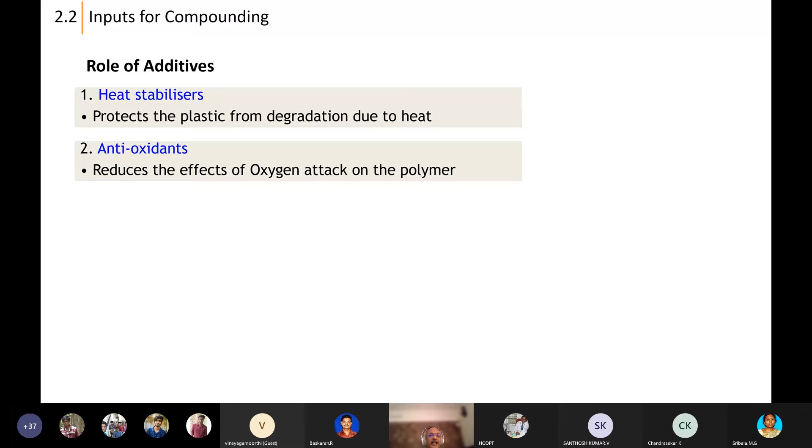Then another important category is the UV and light stabilizer. Today, most plastic parts get exposed to sunlight. Sunlight is dangerous because UV light has a very bad effect on the parts, degrading the plastics. Plastics are susceptible - expose any plastic part to sunlight and after some time it will break like appalam, it will simply break. So any plastic exposed to sun should have resistance against UV.

So here, a lot of hindered amine light stabilizers are commercially available. When you get into the industry, you will be able to know which ones are commercially available. These additives give protection - they absorb the UV light and give it back in another wave, another frequency, thereby protecting the plastic from the effect of the UV. That's all.

So you see a car has got a lot of plastic parts on the outside, like mainly the bumper. Bumpers were once made in metal. Today, almost all car bumpers are made in plastic only. These bumpers are made of polypropylene with impact modification as well as UV stabilizers and light stabilizers.

Here again, how you check whether it has got sufficient UV stabilizer to withstand this effect is you have testing equipment like weatherometers. In a weatherometer, you expose it to UV light, you expose it to conditions like rain or daylight, and then over time, after exposure to UV light, you test what is the drop in property.

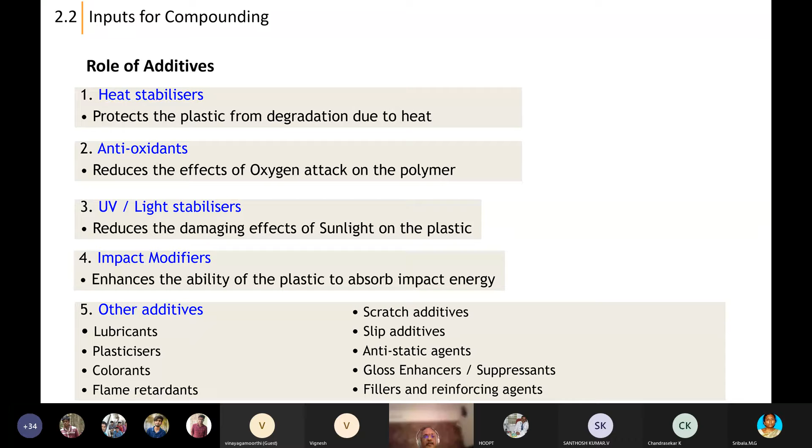Then the last category I am talking about is filler and reinforcing agent. They form a very good percentage, something like 10 to 60% of the plastic formulation contains fillers and reinforcing agents based on the end use. That is a large category. Apart from this additive, there are other additives also, which I am not touching right now. So let me get into the fillers and reinforcing agents. What is the role of a filler and reinforcing agent?

So you have again a variety of fillers and reinforcing agents. First, you have mineral fillers: talc, chalk, calcium carbonate, wollastonite, red sand. All these are mineral fillers. What happens is it gives you higher heat distortion temperature, so higher service temperature.

It also enhances the paintability in some plastics. If you take nylon 6 or nylon 6/6, a plain one is very difficult to paint. If you paint it, it will peel off because there is not sufficient adhesion between the polymer substrate and the paint. In such cases, you add a mineral like talc. Talc offers a surface which likes the paint surface, so the adhesion between paint and polymer substrate improves when talc is added in a nylon matrix.

So mineral fillers are a major constituent. Bumpers normally use a mineral also. Another big advantage of mineral is it will also bring down the cost.

When you have 100% polymer, take for example nylon. Today nylon 6/6 is 400 to 500 rupees per kilo, whereas a filler like wollastonite, used in nylon, is 60 to 70 rupees. So if you substitute 10% of the polymer, it brings down the cost. Of course, there will be changes in properties. Depending upon the application, the user can decide how much filler content is permissible for a compound.

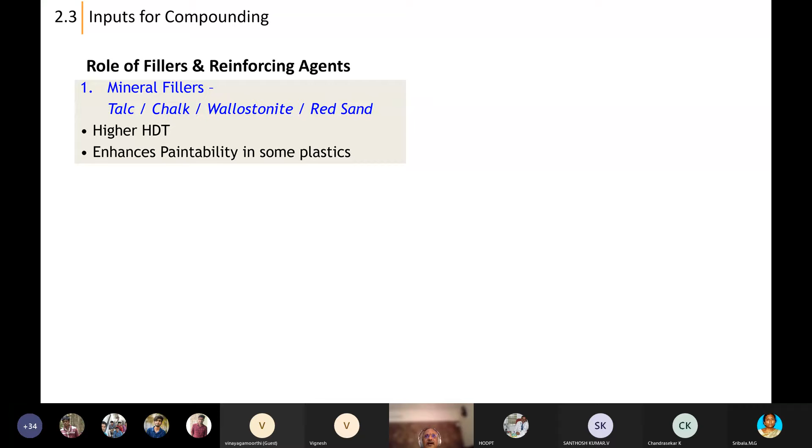But the red sand they use cannot simply be taken from the ground and used. They have to reduce the particle size, make it uniform, then add it. So it is not a viable alternative for other countries.

The other category is glass beads. Again, in glass beads, there are solid beads and hollow beads. A glass bead is nothing but glass powder. You take glass, you powder it, you get glass powder, that is glass beads. So again, you have solid beads, which are solid powder, and hollow beads have a vacuum inside, which is very hollow. So depending upon the performance and the component, it gives different strength.

Hollow beads are the latest technology. They are not fully commercialized. They are in their infancy. So right now the cost is very high. They give you a very good thickness to performance ratio - I will come to that later. They also give you higher thermal properties.

Isotropic shrinkage: in any plastic part, when subjected to processing, especially injection molding, you have a flow direction and across direction. I hope students can understand flow direction and across direction. You have a flat component, and you are injecting from one side, so material flows from one end to the other - that is flow direction. The other direction is across that. The property of plastic varies between flow direction and the other direction, which is not good for many applications.

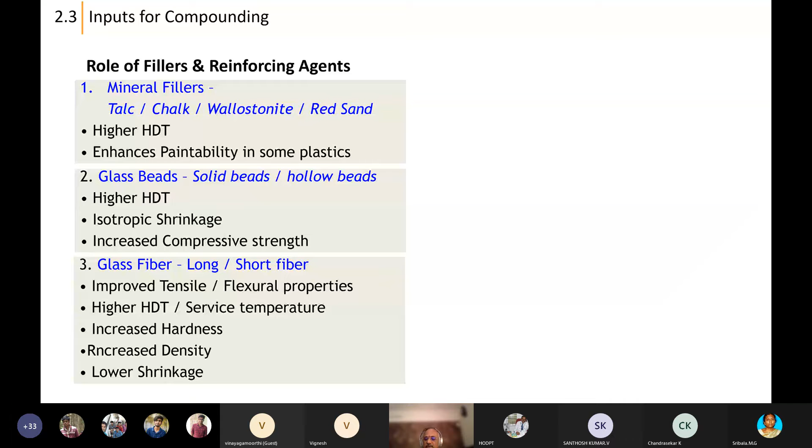Then we'll see specialty reinforcements. You will not see many commercialized ones here. Of course, carbon fiber you would have heard of. Boron fiber and basalt fiber are very, very rare. They give you excellent properties. A basalt fiber is actually made from rock - basalt is a mineral available mainly in Russia. They powder it and melt it at a very high temperature, around 1500 degrees centigrade, and make it into a fiber, which gives exceptional properties. You can see the word excellent strength-to-weight ratio, strength-to-thickness ratio. This is very critical when you use carbon fiber, boron fiber, or basalt fiber - for a very low thickness, you get exceptional performance.

For a lower weight compared to metal, it will be able to withstand a good load, very good thermal performance, and controlled coefficient of thermal expansion. You all know every material has got a coefficient of thermal expansion.

You see metal, when exposed to heat, expands. That's why railway tracks are laid with a gap between two tracks. Why? Because in summer, when the temperature goes up, the track length also grows. If you put one track next to another very closely, they will collide and distort. That's why they leave a gap between two tracks to take care of the coefficient of thermal expansion.

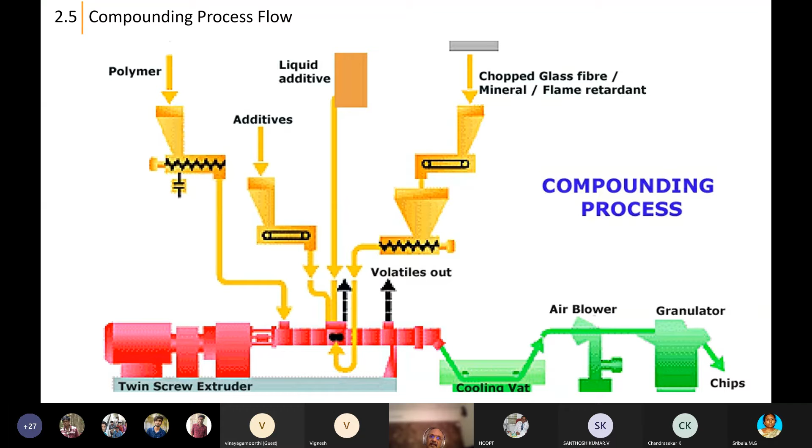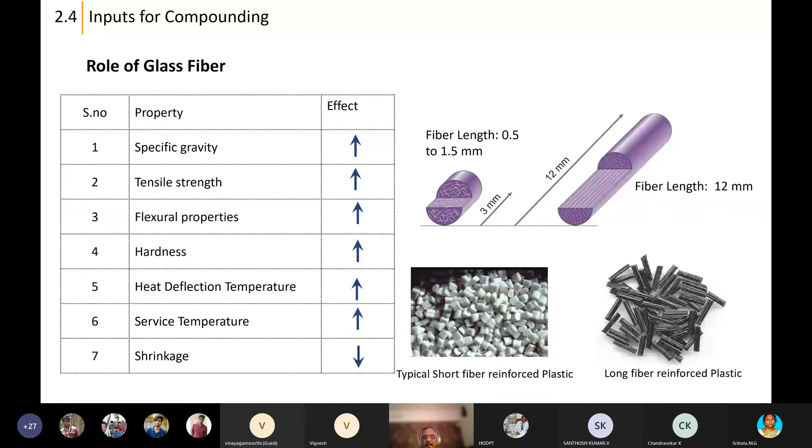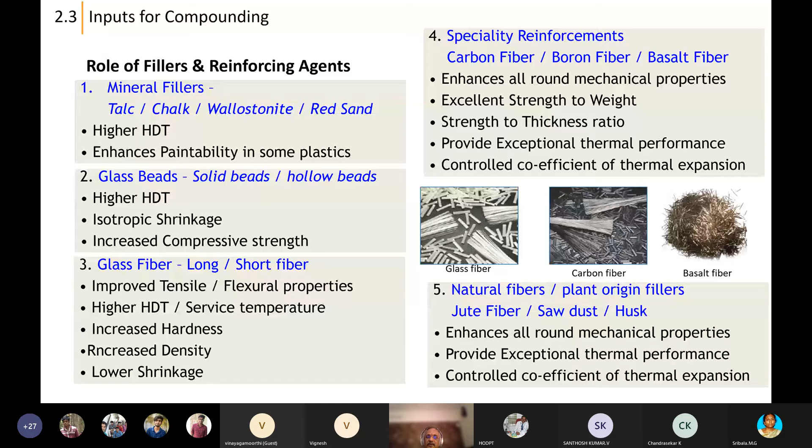The extruder screw will be rotating, it will pull the glass fiber, and depending upon the ratio of polymer and glass fiber going in, you decide how much glass content is there, either 15, 20, 30, or whatever you want.

So this is the compounding process flow. You have an extruder where the polymer, all additives, minerals, and reinforcing agents are used. They are melted, they mix very well inside the barrel, come out of the die in the form of a strand, get cooled in the water, and then the longer strand is cut into smaller granules.

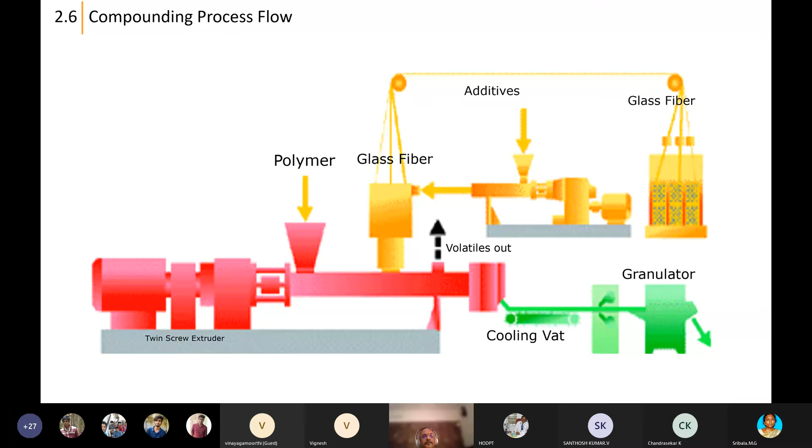Again, you can use a single screw extruder also. The earlier two process flow diagrams I showed used a twin screw extruder. When the compounding technology first started, people used only single screw extruders. Even today, it is used in the case of PVC and some other polymers, like recycling and all.

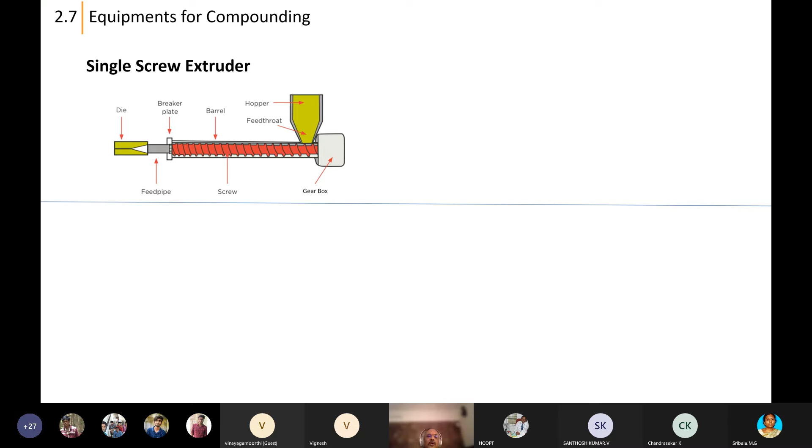In a single screw extruder, you simply see one extruder. There is a barrel on which heaters are placed. You load the material into the hopper, and from the hopper, by gravity, the material flows into the screw. When the screw rotates, because of the friction between the screw and the barrel, the material moves forward.

So what facilitates the material movement from the hopper to the front end of the barrel is friction and gravity flow, that's all. Depending upon the type of equipment, the type of polymer, the temperature, or the screw design, you may have varying levels of movement of plastic, so surging can happen because the flow of polymer may not be uniform.

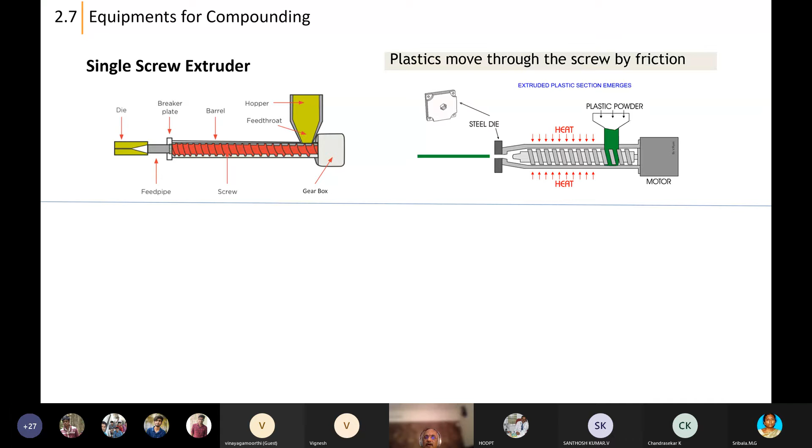So these days we do not use a single screw extruder for compounding. 90% of equipment used today is a twin screw extruder. There you have two extruders which are intermeshing, rotating in the same direction or opposite, known as counter-rotating and co-rotating. The majority in use are co-rotating, where both screws rotate in the same direction, close to each other.

When you see the two screws rotating, you can see the intermesh, where each screw is almost touching the other, so whatever material falls between the screws gets carried forward positively. Whatever falls in the polymer feed zone will pass through the entire barrel uniformly, get melted, get thoroughly mixed, and then come out of the front. So you have different sections.

Another beautiful part: in the first picture, you see the single screw extruder is almost a uniform kind of screw, with differences in pitch and screw depth depending on the feed zone or metering zone. But in a twin screw extruder, you can see multiple types of segments are used.

There are segments which will help you mix the polymer thoroughly, segments which help make the flow of the polymer fast and also retard the flow. You also see a port for vacuum degassing, which means gas will come out of that.

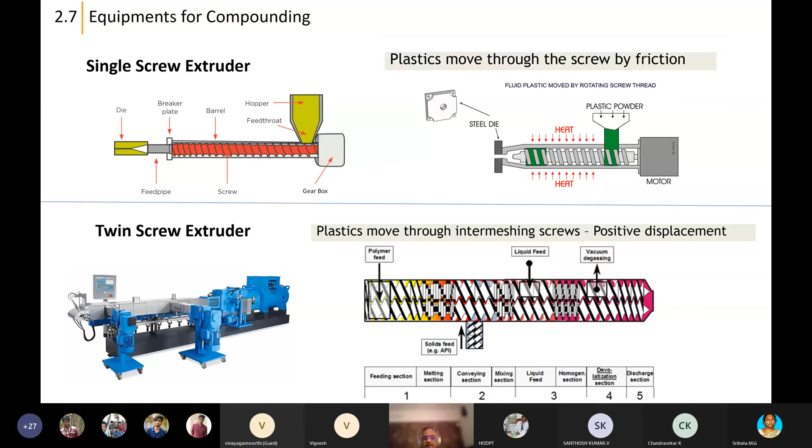Now let's talk of the feeders. In the compounding flow, you saw a feeder feeding all the raw material into the extruder. There are different types of feeders. The simplest one is called a volumetric feeder. In a volumetric feeder, there is a screw rotating. You add polymer into the hopper, and the rotating screw takes the material forward and pours it into the extruder. That's all. So the feed rate fully depends on the density of the material.

If you have to calculate how many kilos per hour it is feeding, you have to check every time. There is no electronic device which will tell you it runs at 10 kg per hour or 20 or 100 kg per hour. Every time you have to check, because when the density of the material varies, the flow also varies. Higher density means more throughput, lower density means lesser. So it is prone to variation, but it is very low cost. Small-time compounders use this volumetric feeder.

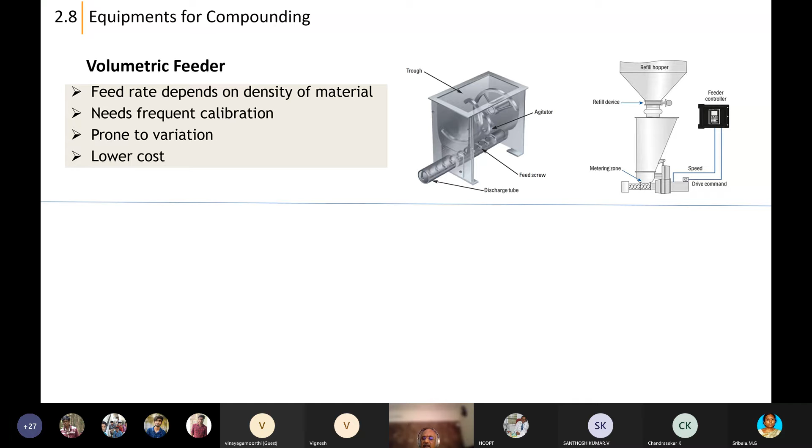But bigger or established compounders use what is known as a gravimetric feeder. Here they use load cells to determine the weight of plastic at any given point of time on the hopper. There will be 3 load cells mounted below that hopper, and it is insulated. At any given point of time, it knows what is the weight of the polymer in that hopper. So you start that feeder.

The load cell knows what weight is available. Let's say it runs for 10 seconds. In those 10 seconds, the load cell keeps checking the weight available in the hopper. After 10 seconds, it tells the control panel the weight has reduced from so many kilos to so many kilos, so you can calculate the material fed in 10 seconds. If you want to feed a particular rate, say 10 kg per hour or 100 kg per hour, you can set it, and the load cell will take care of it. The control panel gives the signal to rotate at a particular speed depending upon the discharge of material.

So these are very, very accurate. They have stepless control, but they are high cost because load cells are used. A typical feeder costs something like 15 lakhs. One feeder will cost 15 lakhs, whereas a volumetric feeder you can get even for 50,000, and a good quality one for just 2 to 3 lakhs. But a gravimetric feeder will be costlier, minimum 15 lakhs for a good one.

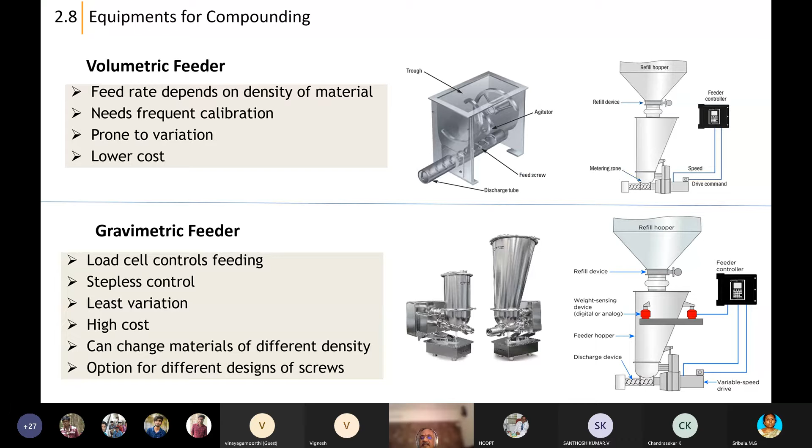So you have an option of different screws. This is about the feeder type. Now compare the last one. The picture is the same: refill hopper, refill device, metering zone. But in between, in the case of a gravimetric feeder, you see a weight sensing device, that is the load cell.

Now, the side feeder. During the compounding process flow, I told you the additives or glass fiber are fed in the middle of the extruder after the polymer is melted. So how do you feed the additive, glass fiber, or mineral from the middle of the extruder? There will be an opening on the side of the extruder, which is a zero pressure zone, and you attach the side feeder there. So one gravimetric feeds the filler into these feeders.

You can see in the second picture a hopper is attached to that, and in the third one you also have a vent incorporated. There could be some powdery additive where there will be flying of additive, and the vent takes care of that. So these side feeders feed the glass fiber or additive mix into the extruder at a place where molten polymer already passes through, because mixing is easier there. Glass fiber also gets mixed very easily with the polymer. So this is a side feeder.

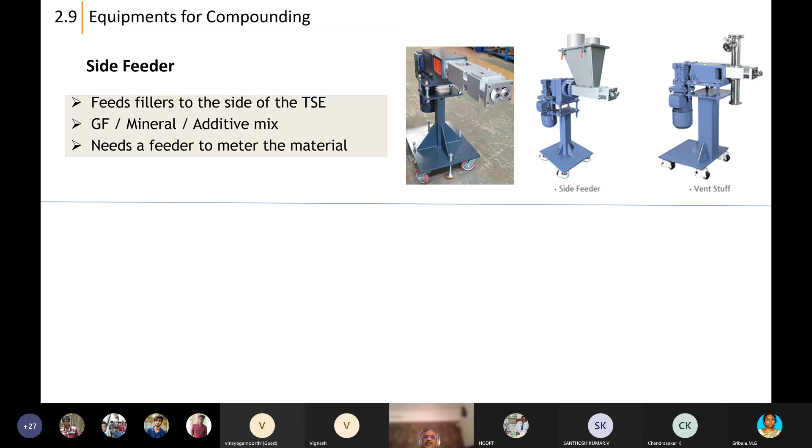I talked about the vacuum port. Vacuum is applied to the vent to remove the volatiles. It's a zero pressure zone, which is very critical to get quality output. If you process nylon and take out the material without removing the volatile, you will see a very good granule, but if you take it into injection molding, you will find a lot of voids in the molded part because volatiles are still inside the polymer matrix. So a good material needs all the volatiles removed from the polymer matrix.

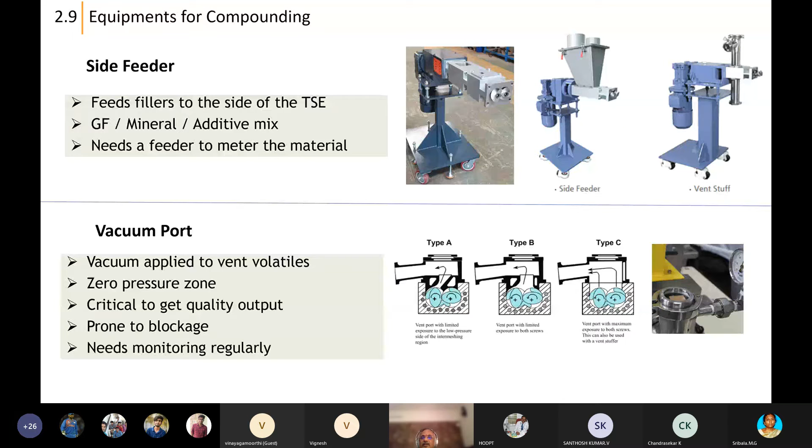Then the air knife. The material comes out of the extruder in strand form, is quenched in water, and then taken out. Since it comes out of the water, it carries water, and if you pack the material with water it will create a problem for the injection molder. So this air knife removes the water on the surface by blowing very high pressure air or doing suction, or both. It's an optional equipment, but many good compounders use this air knife to make the strand very dry.

The second picture you see is a blower type, it only blows the air. The first picture is a suction type, where the box contains a compressor that sucks the air. It is more effective.

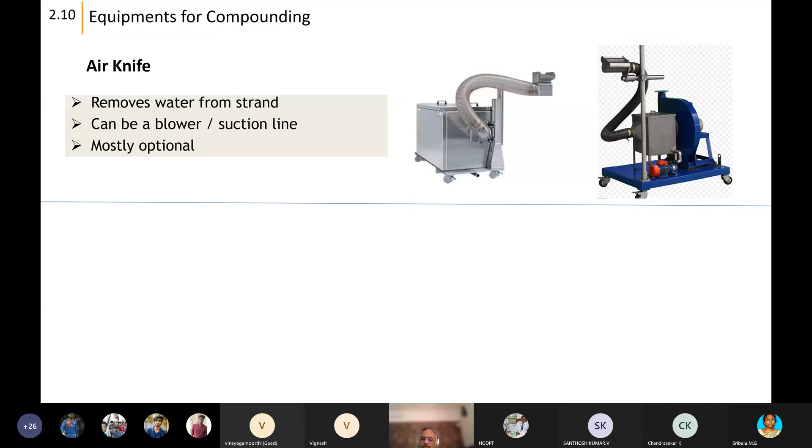Then comes the granulator. The function of the granulator is to pull all the strand and cut it into small size. The strand coming out of the barrel is pulled through the roller in the granulator. In the picture, you see a white color roller that rolls against another roller below and pulls the strand. The strand is fed below, and behind that you see a rotary cutter which cuts the chip uniformly. Depending on the speed of the cutting roller, the chip size is determined.

You normally use a hardened knife cutter. A tungsten carbide cutter is very good because its life will be very long. If you use a hardened knife, every month you have to change and sharpen the cutter, particularly when using something like glass reinforced nylon. Whereas if you use tungsten carbide, the equipment can run for 1 year without interruption.

There is another type called underwater pelletization. In the third picture, you see here you will not use a strand. There is no quenching, you don't take it out as a strand. The die is fixed, and the cutter is fixed to the die itself. On the die front, it rotates at very high speed and keeps cutting whatever material is coming out of the extruder. So in this type of underwater pelletizer, granules are cut into small size at the die itself.

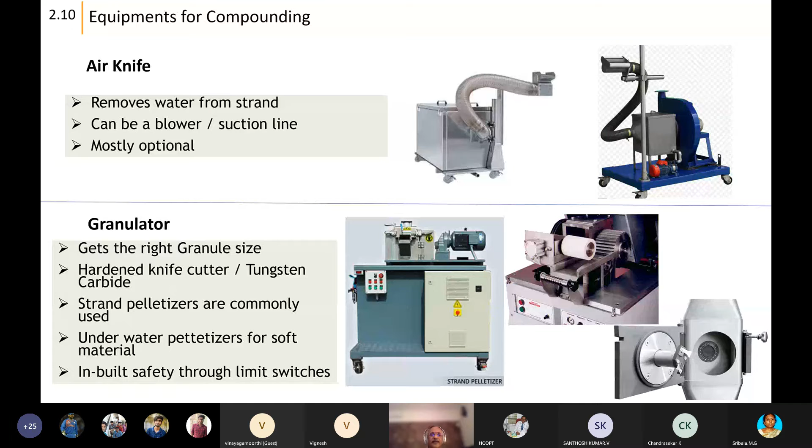Now, after the granules are formed, you have a vibratory sieve. A vibratory sieve is like a sieve (சல்லடை) that separates different particles, similar to how we separate things at home. It is required to do this for the granules as well. There will be uncut material, larger size pieces, and some powder. If powder gets mixed in and you mold it along with that, the powdery polymer will immediately melt and char, reducing the property of the part. So you need to separate the powdery particles and uncut particles.

Uncut particles will go and block the injection molding throat, so you should remove the uncut or large size pieces. The vibratory sieve does that by continuously vibrating. There are multiple meshes, each with a specific size. The top portion removes all the larger pieces, and the bottom-most mesh removes the powder. So you will pack only good-sized granules.

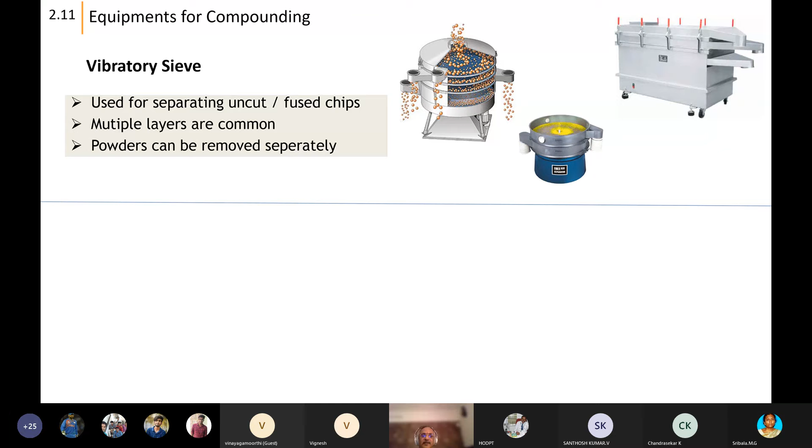Again, there are different types of vibratory sieves. I have mentioned 2-3 types with photos there. This is very essential to get a uniform size of chip.

Then the last stage is a dryer. You are passing the strand through a cooling vat, then trying to remove the water with an air knife, but the material can still carry some moisture because materials like nylon and PBT are hygroscopic. They absorb moisture, so some residual moisture could be there. A compounder would like to remove that moisture before packing.

So again, there are multiple types of dryers. The simple types are those which simply circulate hot air. The material, the final granule, will stay there for an hour before getting packed.

There are also what is known as dehumidifier dryers, which are a very good option. They thoroughly remove the moisture because, in the drying process, you are trying to remove water. When you pass dry air, the granules get dried, but as moisture comes out, the air gets filled with water, and after some time the efficiency of that air is no longer good.

In a dehumidifier, you use a desiccant. The desiccant filters the air and removes the moisture, so once again dry air is fed into the dryer. These are very efficient but are power guzzlers, taking more power because multiple blowers and motors are used. But it also gives you a good, thoroughly bone-dry material.

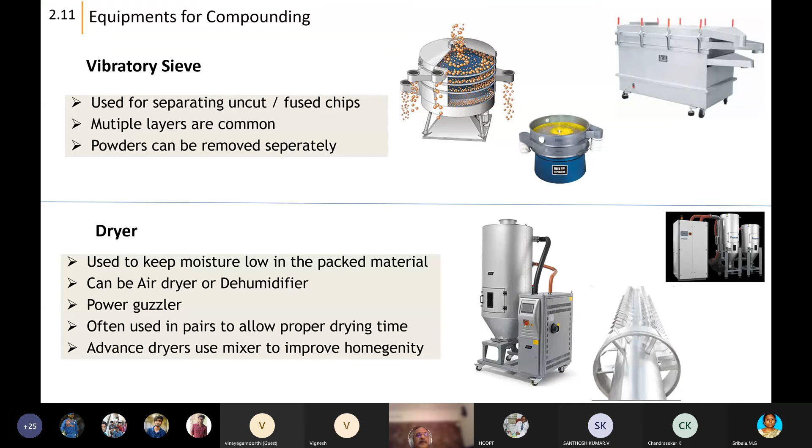So these are all the equipment which are very important for the compounding. Okay, I have taken a little more time to explain, I hope it's not a problem. Now I will get into the effects of the compounding.

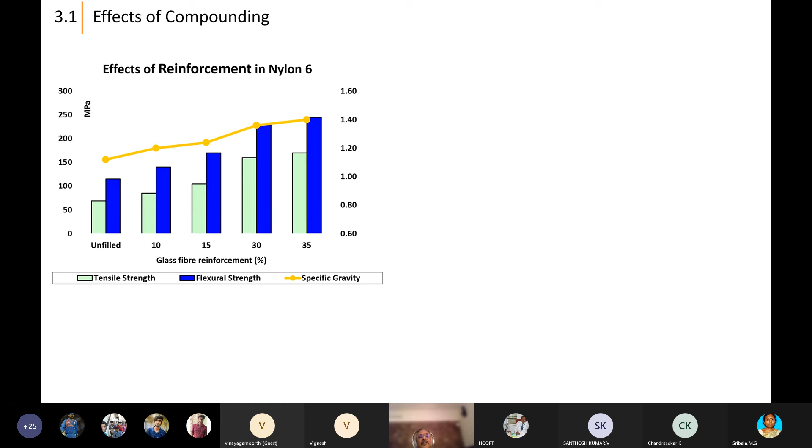The first example is nylon 6 with glass fiber reinforcement. In the graph there are two bars: light green is tensile strength, dark blue is flexural strength, and the line shows specific gravity. When you increase the glass fiber from unfilled to 35%, I have depicted the property for unfilled, then 10%, 15, 30, and 35. You can see how the tensile and flexural properties go up, and how the specific gravity also goes up. This is the effect of different percentages of glass fiber on nylon 6.

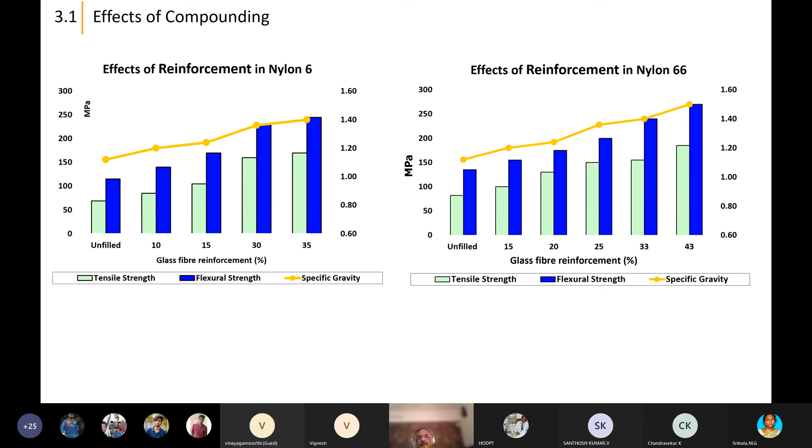The same thing applies for nylon 6.6 -- not a big difference, but in nylon 6.6 you normally go up to 43%. Even today we also give 63% glass fiber in nylon 6.6. The higher the glass content, the higher the specific gravity, the higher will be the component weight. At the same time you have higher tensile strength, flexural strength, and modulus, which means rigidity will also be higher. This is on nylon 6.6.

If you try to break the specimen of a 30% glass reinforced nylon 6, your hands will get a shock, the energy shock. Anybody doing testing of it will understand that -- so much is the energy.

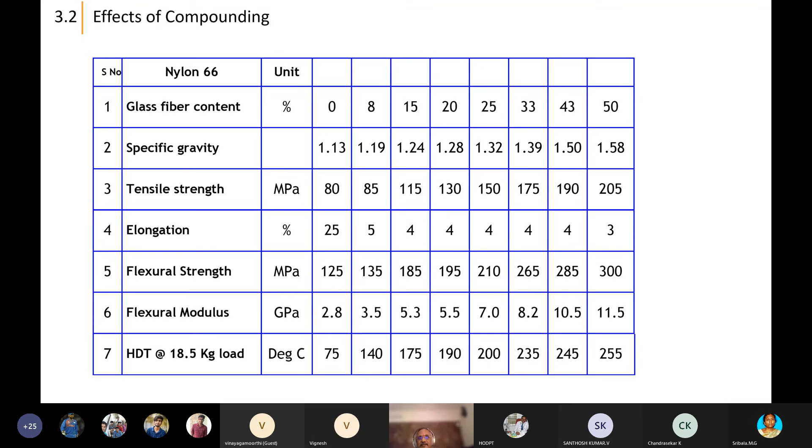Look at the heat deflection temperature at 18.5 kg load -- from 75 degrees centigrade for the unfilled, it goes to 255 against a melting point of 265. Nylon 6.6 melts at 260 to 265, and your HDT can go up to 255 for short-term duration. In service, from 70 it will go to 120. So this is the effect of compounding using glass fiber.

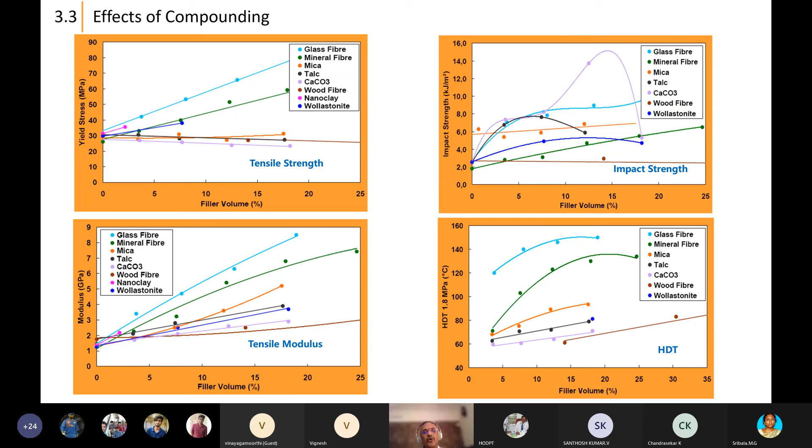That actually brings the end of my lecture. I think I have covered a decent requirement in compounding to understand the basics. We saw the basic steps of plastics, disadvantages of the base resin in end use application, why compounding is required, various additives and their purposes, the compounding process flow, the equipment essential for compounding, the effects of glass fiber reinforcement in polyamide, and the effect of various fillers with different loading in polyamide.

As I informed in the beginning, only the filler load is very high -- you load something like 5 to 60%, whereas all other additives like heat stabilizer, UV stabilizer, slip additive are added in very small quantities, 0.2%, 0.5% like that. Lubricants maximum 0.5%.

Plasticizers, depending upon the plastic, can go up to 8 or 10%. An additive like optical brightener, you add as low as 0.001%. It enhances the brightness of the plastic. So if you have a white or natural color, you add an optical brightener, something like a stilbene derivative, and it will enhance the brightness. They are added very low, around 0.001%. So the percentage varies, the performance varies, and you enhance the end use application.